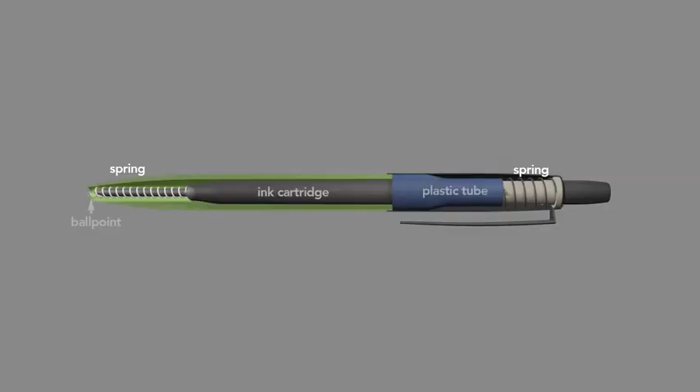The pen's barrel houses an ink cartridge with a ballpoint tip, 2 springs, one at the top and one at the bottom, and a plastic tube which is press-fit inside the metal barrel of the pen so that it's fixed in place. Inside that tube is where all the action happens.

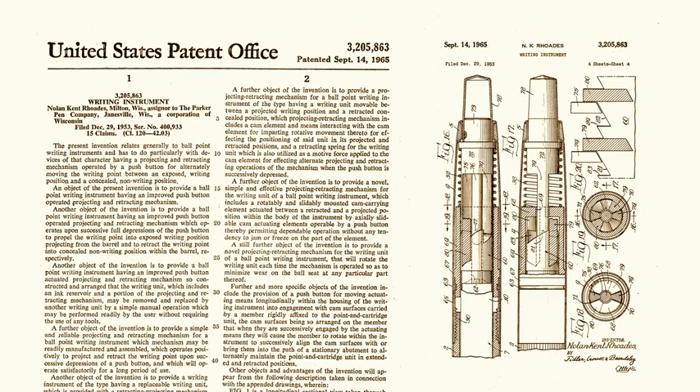A Parker Pen Company patent describes the 3 parts that produce the pen's click: the cam body, the tubular plunger, and the stop members. The cam body is affixed to the top of the replaceable ink cartridge. During operation, this cam body rotates and slides up and down. The tubular plunger does not rotate. It only slides up and down.

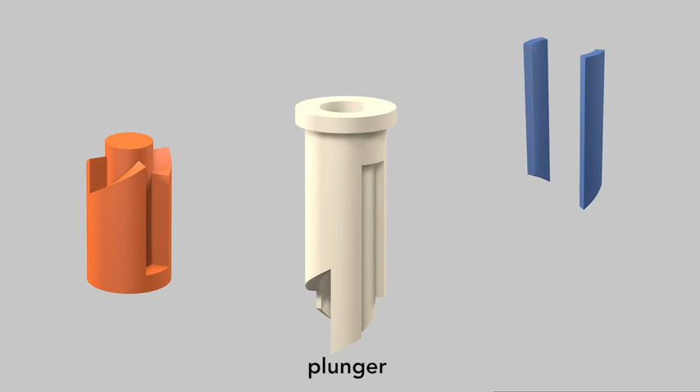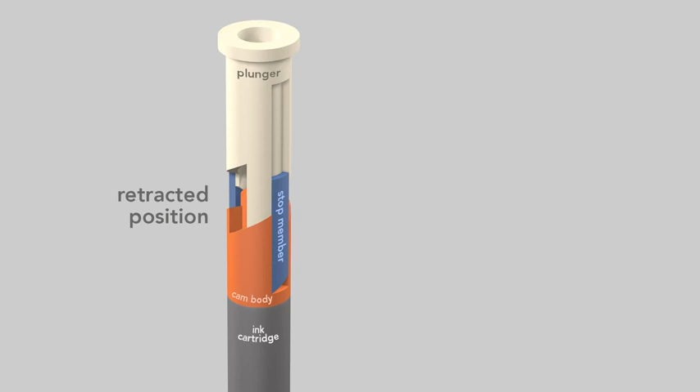The stop members are shown as separate pieces here, but keep in mind they're part of the press-fit plastic tube and so never move. The pen can be in either of 2 positions: the retracted non-writing position where the tip of the cartridge is inside the barrel, or in the extended writing position where the cartridge's tip projects from the barrel. To see how the plunger, cam body, and stop members interact, I've broken the cam movements into 8 steps.

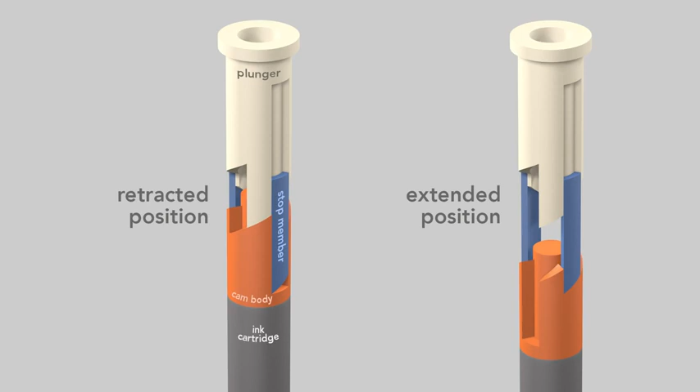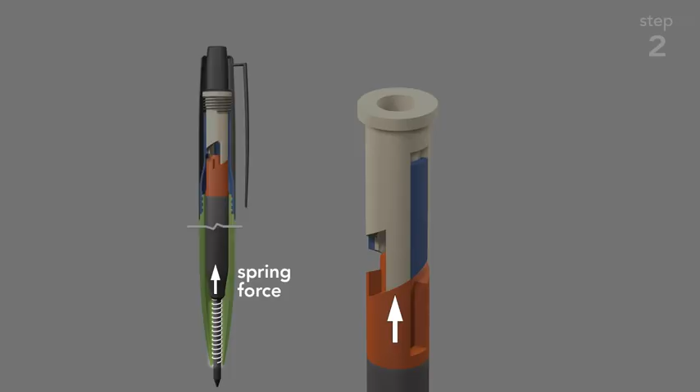First, push the button to drive the plunger and the cam body down the barrel until the top of the cam body drops below the fixed stop members. Second, remember that the spring at the bottom of the pen pushes the cam body up and so keeps it in contact with the plunger. That axial spring force shoves the cam body up the barrel, but also rotates the cam body because it mates with the plunger at an angle.

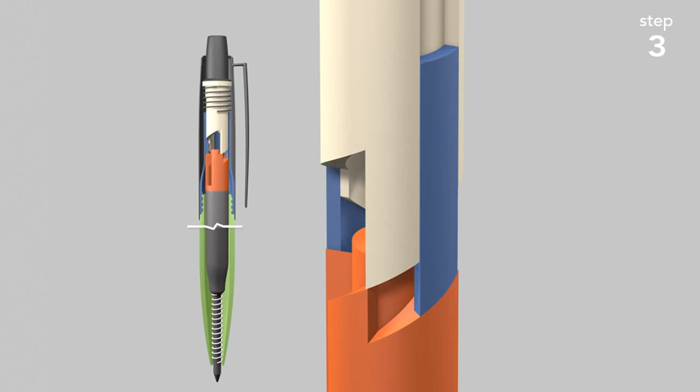The cam body rotates 45 degrees until it strikes the surface of the plunger. That very fast motion creates the first click. Third, I release the button and a spring between the plastic tube and the lip of the plunger forces it to the top of the pen. When the tips of the plunger's fingers clear, the cam body rotates another 45 degrees until it strikes the blue stop members. That's the second click of the pen.

Fourth, I release the button completely, and now the cam body remains locked in place. It cannot rotate nor move upward, and so the pen is ready to write. To retract the pen, I press the button to drive the plunger into the cam body and to push it past the stop members. The cam body rotates until it strikes the plunger. That's the third click. I release the button so the top spring forces the plunger upward.

When the plunger fingers clear the cam body, it slides and rotates 45 degrees until it strikes into the stop members. That's the fourth click. Once the button is completely released, stop members slot into the cam body so that when the plunger moves up, the cam body moves with it to retract the ink cartridge.

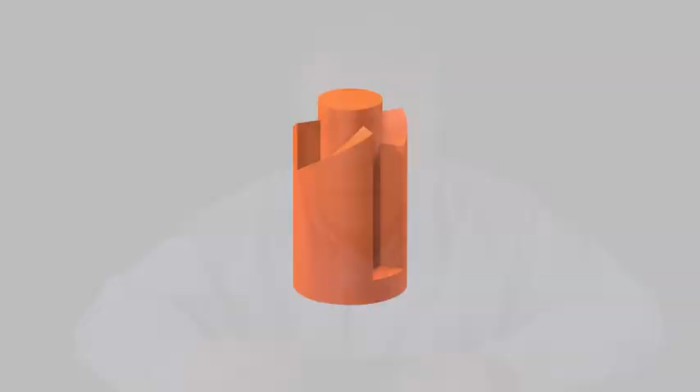In extending and retracting the ink cartridge, the cam body rotates 45 degrees 4 times, or 180 degrees total. The cam body has 180-degree rotational symmetry, so that the next extend retract cycle repeats the same sequence of steps.

This particular model of pen has sold over 750 million units since its debut. It took a team of 66 people to design this pen. And although it's a mechanical marvel, the Parker Company worried that this retractable ballpoint ink pen would damage their reputation. Parker pens were fountain pens. And so the company left off their iconic arrow clip.

But within 4 years, the pen earned its arrow and inspired other pen makers to design click and lock mechanisms, all different to avoid patent infringement. The clicking of a pen demonstrates how a single engineering problem can have many engineering solutions, ranging from robust to cost-efficient to unique. I'm Bill Hammack, the Engineer Guy.